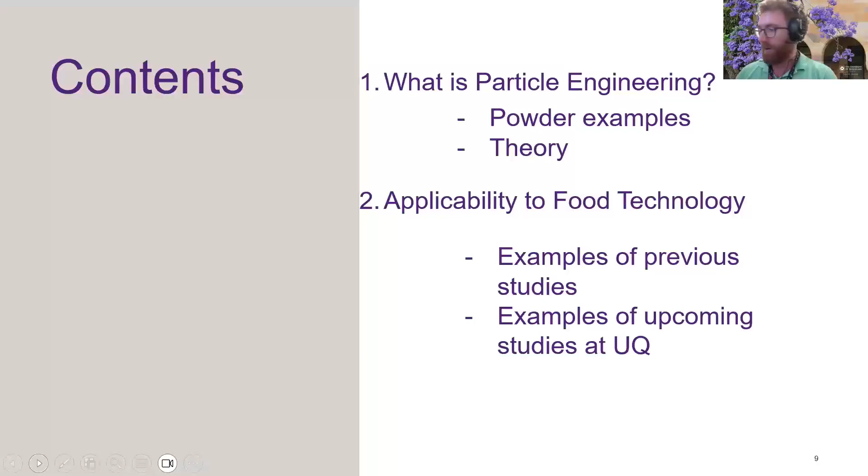And what I intend to do here, I'll give you some brief examples of what I envision myself working on. These are some examples of powders you all see and deal with in your daily life. When you go to the grocery, you use flour to make bread and other bakery products. You can also use almond flour if you are gluten allergic or for having healthier products.

Powder also includes salts and all the condiments like spices, turmeric, or peppers, black pepper, paprika - all of them are powders and can be defined as such. Other things that are less common are food colorants. You see at the bottom center, beautiful colors obtained chemically, not very friendly for our body.

We also have ready products like cakes - those are all powders. And then we have dairy powders, which is extremely high here in Australia and even more so in New Zealand. So an example here, I put a dairy powder, or it can also be lactose powder, or whey protein if you do some sports.

Ready ice creams, a very interesting product, sold as powder. Also Milo, a very Australian supplement product, also made of powder. These powders are so great and popular in food because their shelf life is at least twice as long as fresh food, and in some cases reaching even 10 times. If you consider milk, when you buy it from the grocery and put it in your fridge, it's not going to last longer than one week at most. The powder, however, is going to sit on your shelf for over 6 months and even more in some cases. So that's the main difference.

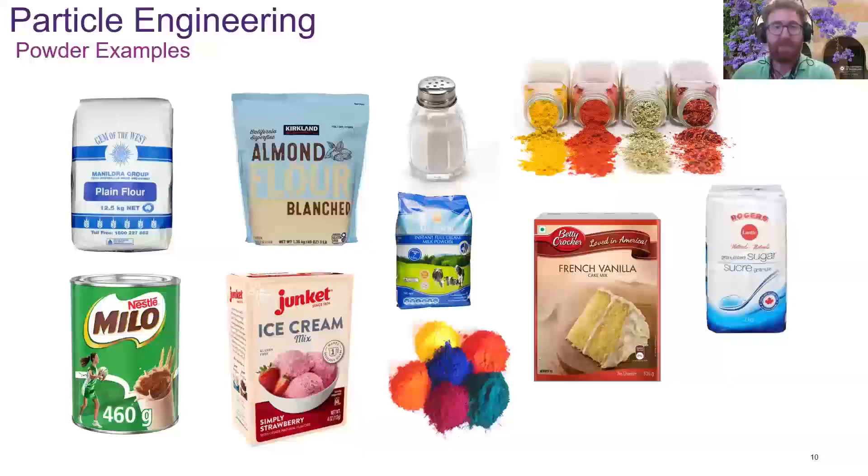I do agree. But from the company perspective, this is an increasingly crazy high amount of revenue. When you think about a dairy company, when they produce milk, they cannot sell all of the fresh milk they collect daily. So what most of them do is create powder, store it, and then redisperse it in water and sell it as fresh milk, whether in Australia or outside. New Zealand is very famous for that, and that's what has been happening for about 20 years now. So that's the main interest that drives particle engineering into food.

Some example here of what's happening economically. I talked about some revenue. You see on the left-hand side, US, which is still the largest economy in the world, obviously now topping up with China. Both of them are buying and producing increasingly crazy amounts of powders in general. What you see on the left-hand side plot is a trend of what happened in 2020 and 2021, and the forecast of what's going to happen until 2030. The number you see is 1.7, 1.8 billion, which is what the market of powder in food is.

On the right-hand side, you have a niche market, a smaller one, Australian. Obviously we are way smaller in population, so the market is way smaller than the US or China. But the example here is egg powder, which Australia is one of the highest producers of in the world. You might not have heard about egg powder, and it's funny because sometimes when you go to the grocery here, you don't even find the eggs.

So a supplement that people buy is powder. You get the powder at home, you can put it directly in your pan with a little bit of water, oil, or butter, whatever you prefer, and create scrambled eggs. You can create omelets, you can create all the products of bakery, cakes, all the products containing egg itself.

So the egg powder market from Australia is in US billion dollars, so it's quite high. We envision, last year in 2022 we had 1.1, this year it's 1.2 billion of egg powder sold in the world from Australia, and we see that increasing in the future. So there are lots of industries interested in powder particle engineering, how to improve their powder's properties, and how to increase their yield in production.

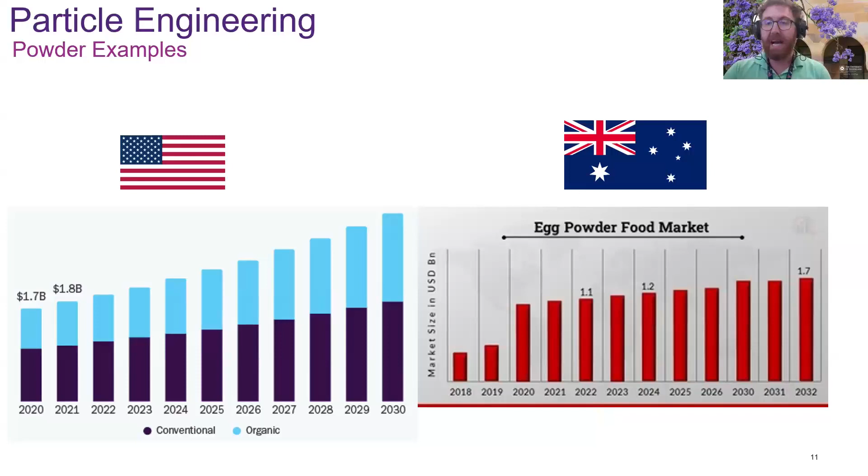The powders I mentioned before, which are part of these large markets, are produced by different types of devices. You see here the two main types. One is the spraying technique, which I'm an expert in and what we're going to talk about today. The one in the blue circle covers all of the spraying world: spray drying, fluidized bed, roller mills, and milling in general. On the right-hand side is a simpler version, the size reduction theory - this is when you collect flour and want to crush it down into a smaller size. Usually smaller sizes help powder redisperse better in water and have a lower footprint for transport. So those two work together, or sometimes one or the other.

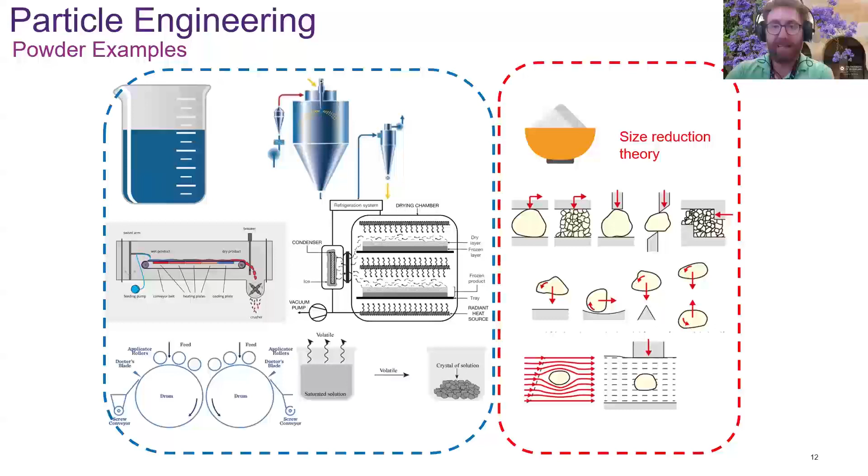I just want to show this to all of you to be aware of what I'm going to talk about today. So what I'm going to discuss today is mostly the left-hand side. The other side is also there, and it's equally valid.

The particle engineering theory revolves around a number called the Peclet number, shown at the center top of this slide, labeled PE. That's equal to the ratio between kappa and... kappa is the evaporation rate, defined in the little sketch at the top of the slide - you see the yellow arrow drawing into the droplet.

That indicates the water or liquid in your system, which is leaving, so it's evaporating. The D is diffusivity, a coefficient for each of your solutes. Depending on your formulation, colloids, or whatever it is, they will have different numbers. Studies talk about how fast or slow the speed of your solute molecules is in that specific liquid, most probably water.

If you think about milk and dairy, that Peclet number will be calculated by knowing the kappa of water, because milk is a dairy compound composed mostly of water. The D will be found for the micelles of fat in water. So there's a specific number for a specific food. This number changes, since kappa depends on temperature, and D depends on density and viscosity. So it changes depending on different situations and within the drying process.

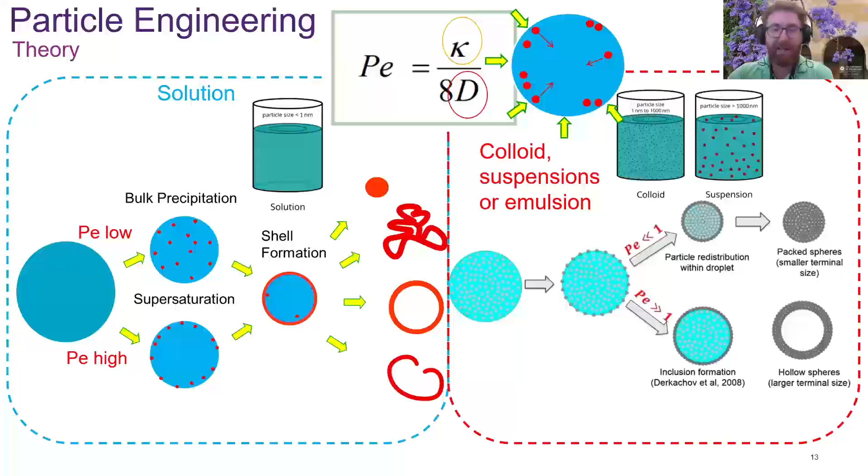The Peclet number follows the same process. When it's lower, you mostly get solid particles, small spheres. When it's high, you usually get a larger particle with voids inside. The theory defines the number 1 as the milestone where things become larger, higher, or lower.

Now I have some examples in the food world for low Peclet number, which is desired. Companies seek rather one aspect or the other—both are equally fine for different entities. For the pharmaceutical world, as Bernadine mentioned, I did work in some pharmaceutical companies. They are more keen on having the low Peclet number because the particles are small and solid, so there is less spacing, so they can put more excipients within the capsules.

So let's see the picture there for the oral delivery capsules. Other properties are also higher strength and lower crystallization chance. One example is lactose powder—it tends to crystallize, so it's usually amorphous, but when there are voids inside, there's more exposure to oxygen and oxidation can occur. Redispersion can sometimes be better, but most companies in dairy like to have something like that for spacing, so they can put more product within the same space.

Another area now interested in spray drying, particle engineering, is algae and microalgae. Spray drying is the most common technique used now to produce powder from microalgae, and they like it small with no spacing, for the same reason as the capsules, for low Peclet number. For the high Peclet number, there are those crumble shapes or open shapes, which are much better for dispersibility.

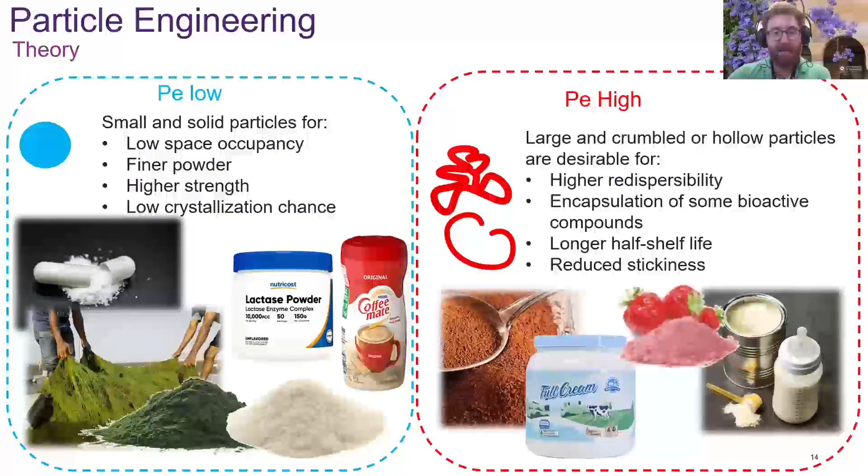In that case, they want also those shapes that are really odd and unique. Infant formula, if any of you have children, is a pain to disperse in water—you have to agitate or use hot water, shake it a lot. That's because the stickiness of lactose and components like whey protein are really hard to disperse. They like to have shapes that allow water to enter faster. So if you have a shape with a hole in it, water contacts the whole structure and disperses the powder better into water. So the infant formula industry is seeking to improve dispersibility by going in that direction. Those are examples of how, knowing particle engineering theory, you can influence the shapes, morphology, and properties of the powder.

These are just two examples, and they're the easiest ones. There are way more, so you can dig deeper into the theory, but for the sake of time, these are the ones I'm going to introduce to you right now.

On the left-hand side, you have the influence of temperature. Any droplet, even in outdoor environments, behaves differently on a hot day versus a cold day. What does temperature do? It enhances the evaporation of the liquid droplets. So for higher temperature, evaporation of water is faster, meaning the water leaves earlier. This tends to create larger droplets because the water leaves fast and more particles end up on the surface first, creating crumbled shapes of the powder at the end.

This depends a lot on your solids—that's why I'm saying this is just two simple scenarios. Lots of solids like to crystallize, such as sugars and salts, which are major components in food. If they do crystallize, the scenario changes drastically. You create crystals, nucleation can happen, and crystal growth will completely affect the appearance and morphology of the powder.

On the right-hand side, what you can also do is change the concentration—how much solute you have in your droplets. You can see from left to right there's a big difference, with more components on the right. When you have more solids and less water, the water has less to evaporate, and the solid will create a shell first and earlier, so the particle will be larger. That's usually not welcome for some food products—you want as small a particle as possible for spacing. When you have large drop particles, they don't like them because they tend to be sticky or occupy a lot of space, unless they have crumbled shapes, as I talked about before.

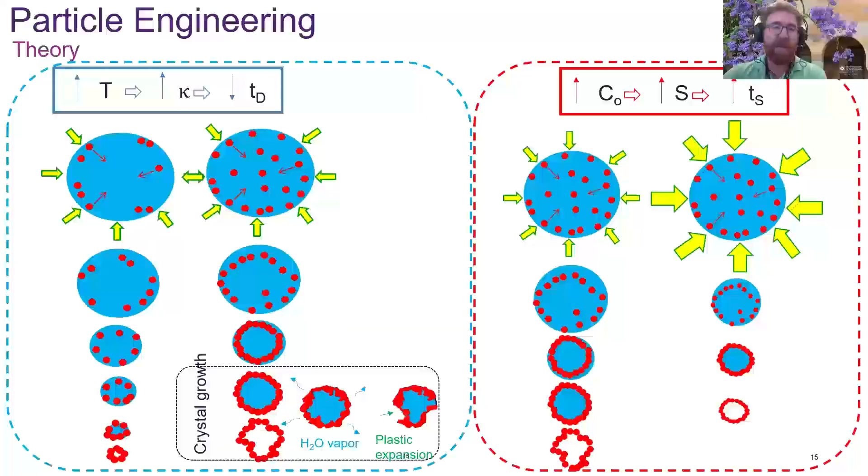Now we go into some examples that I worked on before in my career. I'll introduce a few, and then we'll go into what's going to happen here at UQ.

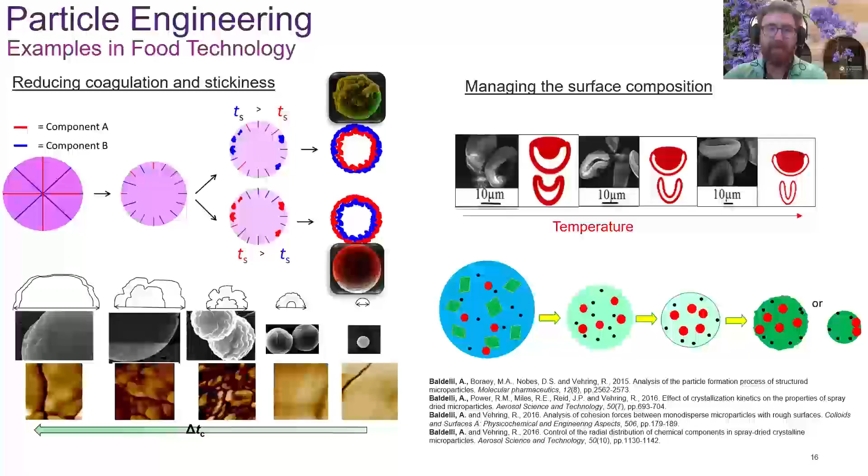Another cool example, now part of a product sold in Canada, is the creation of a fat replacer from chia seed. This was a master's student project at the University of British Columbia. She was originally from Mexico and was really interested in creating a product from chia seed.

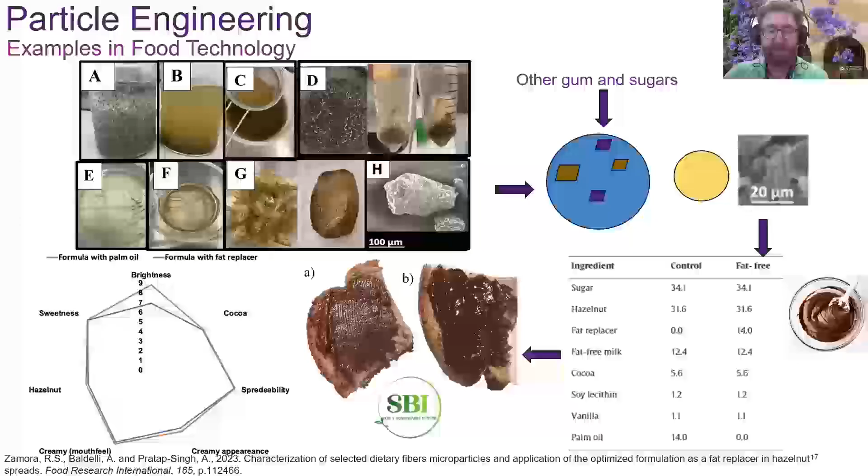Another study I worked on was spray drying of fruit juice—we worked with strawberry, mango, and orange. This was also a master's student project, but she spent about a year on it. The reason is that in Canada, they produce a lot of berries; strawberries and blueberries are number one, and they don't sell all of them. So what they do is sell powders to other countries, where buyers redisperse the powder into their products and sell it as fresh.

So that's what's been done so far—some people produce the powder by freeze drying and then milling or crushing. That's fine, but it's very sticky. When you create powder like that, especially from strawberry, it creates a huge amount of agglomerates, and it's very hard to disperse in water, creating unpleasant final products for customers. So one way to decrease the stickiness, as shown so far, is by changing the powder's properties. In this case, we tried a few formulations.

We compared with the pure juices, or P. Then we used maltose of different types with different DE ratios. We used maltodextrins, which stands for MD. And then we also used HPMC, which is a cellulose polymer soluble in water. We also used whey protein.

The reason we use this material is because maltose and maltodextrins are already highly present in food and cheap. The other material, whey protein, is great because it's coming from a source like dairy, so it's nature-based. And the cellulose was used before to encapsulate other compounds like minerals or other bioactive compounds, and they're all FDA approved.

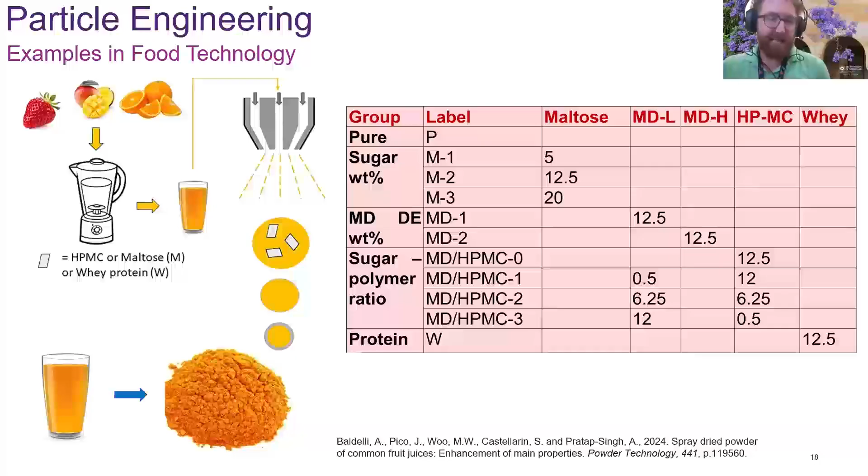We did not test only the color, we did UV and other techniques to better show the dispersibility. Now for strawberry, the whey protein did not really work well because in that case, the strawberry was not fully entrapped by the whey protein. Most of the reason is that the strawberry juice was thicker and denser than mango and orange, so the amount of actual juice was higher in that case.

What worked best was the polymer HPMC. It has larger molecules, so it can better cover the whole strawberry juice. And we had a better quantity of polyphenols and other contents of strawberry.

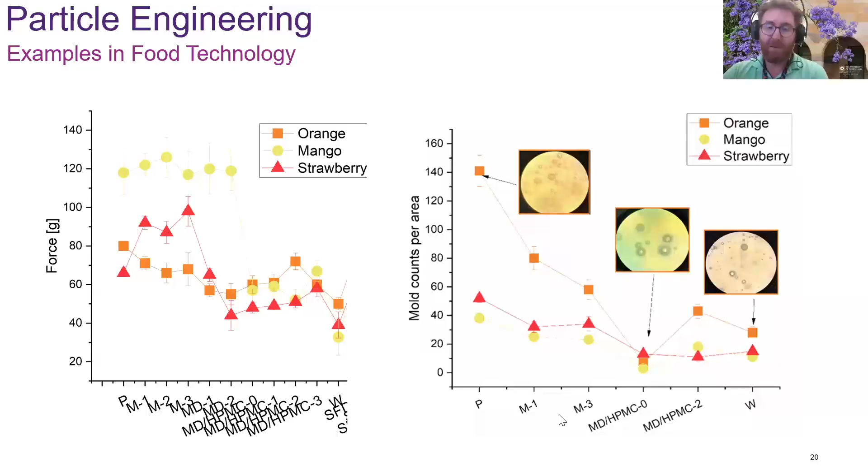And this was after 1 month of storage. So we did not have a lot of mold growth in general in most of the cases, which was great - and that's what we wanted to do, to increase the shelf life.

Next example - this is one that I'm very proud of because it's more humanitarian, and I think I talked before to some of you about this - this was with the government of India. India specifically has a big issue with anemia, especially for women, due to their dietary requirements for religious purposes. They don't eat meat, but they drink milk, so they don't get a lot of vitamin B12, especially, and iron. So they want to have a fortified bread.

The picture you see at the bottom left is something that they worked on before. You can see the color - it's really not that welcome, and there are some clumps in there. So when you eat it, you can feel some differences in the texture, which is definitely not pleasant.

So what they wanted to do is create a naan bread, similar looking, similar color, all the same, just fortified, and they could give it to the populations, especially the poor ones, to get some intake of iron. You might say, why not give them supplements? It's because supplements are way more expensive to produce, and some people aren't keen on getting pills whatsoever, especially in some villages. So having a fortified food product is very important for some people.

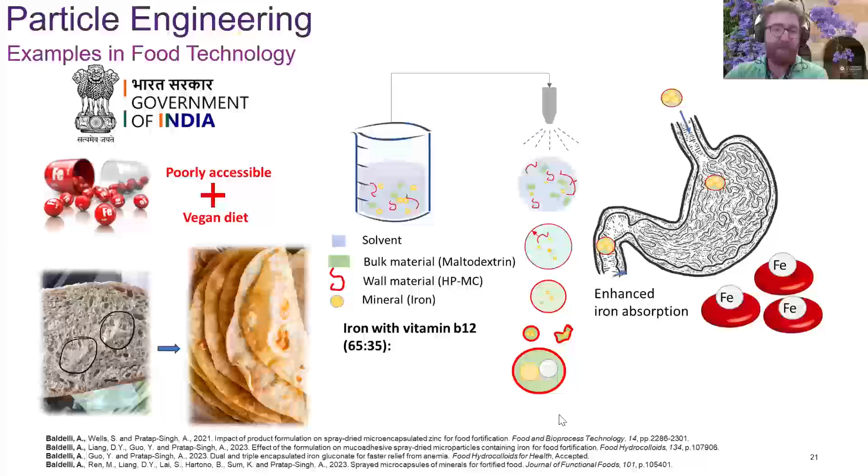So what I've done there, we created a large formulation matrix, including iron and other minerals, vitamin B12, and folic acid. Vitamin B12 and folic acid are great supplements for pregnant women, which was the main target of these studies, as well as for anemic people. So we created this powder and tested the delivery on the human body, but so far we've only reached the animal test stage.

When you take supplemental iron, sometimes it's completely messed up by what we eat. So if you eat dairy, for instance, calcium and iron counteract one another, so we don't absorb any. Whenever you eat meat, don't eat yogurt or drink milk at the same time - wait a few hours before consuming any dairy. That's also one of the problems they have in India.

Now I'm going to talk about some of the upcoming projects for the students I have. I did not mention all the master students. This is going to be a project for PhD students, so a longer project, more in-depth.

These students will come from Norway. I received a scholarship joined from between UQ and DTU for her. She's going to work on seaweed and microalgae. Her project will be to create a fat replacer sourced only by seaweeds and microalgae.

So there will be a first part where we extract here minerals and vitamins, and in DTU proteins and lipids, and then we'll combine the extracted bioactive compounds into one using spray drying techniques to create powders that can be used for different applications and products.

There is some interest in marine bioproducts, the CRC, and other local companies that do like these projects and might be interested in doing side projects specifically on beauty products or microalgae for health.

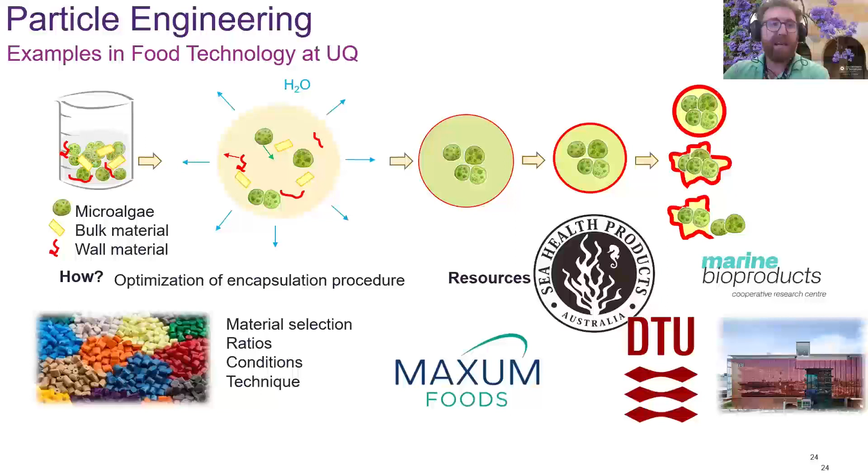The other project is the other PhD who is coming along this October. She's flying in a couple of days from now. She will work on creating again a fat replacer powder, for food fortification. What I envision doing is using some nut oils - macadamia, almond, and walnut. We still have to define which one to go with.

And the students will also work on drying coffee beans and coffee to create powders from coffee, and ultimately to create an instant plant-based cappuccino.

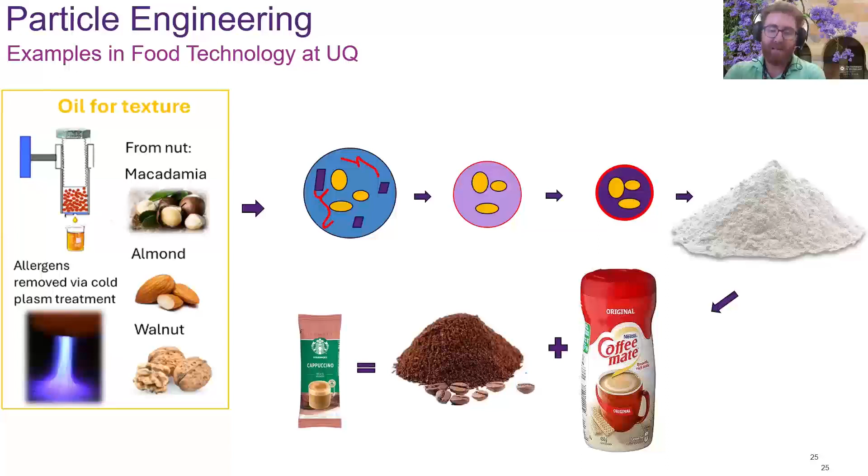So this is pretty much on my side. If you have any questions, I'll pass it over to Bernadine, who's going to show you how to ask the questions. I think now is the time. If you need to ask, send that through the Q&A function in Zoom.

Thank you very much, Alberto. That was a really fascinating presentation and a really great introduction to particle engineering, which was very accessible to me as a non-particle engineer. And such a great range of applications for this technology.

So we have one question to start with in the chat. Sorry, no questions in the chat - questions only go into the Q&A section. So we already have a question in the Q&A from Jackie from CNAFS. Thanking you for your presentation. Yeah, you know Jackie.

So she is wondering about the consumer study for the hazelnut spread. Besides appearance, did you also look at the texture in the mouth, and what about preference? Yeah, so that's a good question.

It was 2021, the end of 2021, so we were still in COVID time. Up in Canada, it was quite closed, so it was very challenging. What we had done is prepare a box for each person who wanted to participate in the study, and send it by mail to each of them at their house. They open the box and fill the questionnaire, then send it back by mail to the department. So we reached about 100 people. The students spent about two months preparing those lovely boxes.